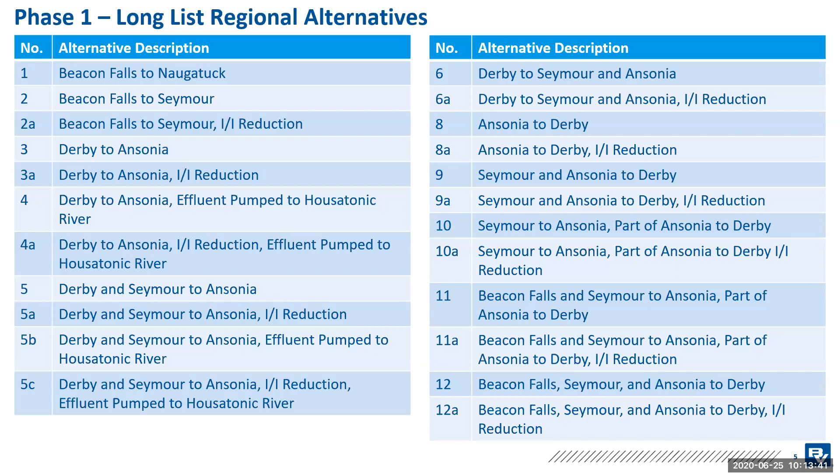So what we did was briefly review the methodology we used in task 2, which is we basically wanted to develop these regional alternatives, and by developing them we felt that we would understand them better, we would understand them more, and that their attributes, particularly their not-so-good attributes, would reveal themselves, and thereby that would be an opportunity to screen them out.

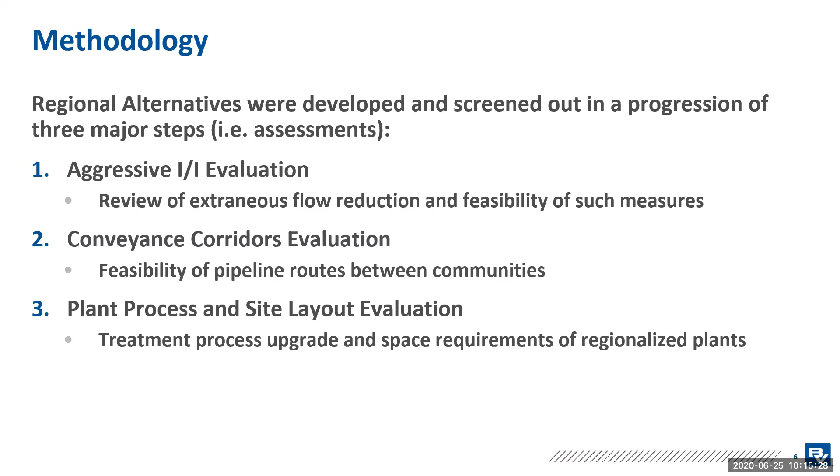We did that development by looking at 3 steps, which are really planning engineering assessments. We took a look at aggressive I&I, we evaluated whether we can remove extraneous flows from the systems, and whether those measures were worthy of keeping those alternatives in, or whether they should be screened out. We looked at the conveyance corridors as well, the feasibility of pipeline routes between adjoining communities, and then we did a treatment plant process and site layout analysis, to determine whether in a regional setting we could fit treatment facilities at these sites. That information was all critical to us, and it allowed us to step through the entire process.

So I'm going to turn this over to Jeff, and maybe you can review with us what we did in terms of I&I evaluation. Yep, thanks, Mario. Can you guys hear me okay? Yeah, very good, okay, Jeff.

So just a note on aggressive I&I evaluations. As Mario noted, generally each of the alternatives had 2 flip sides of the coin regarding infiltration and inflow, which is I&I. One is kind of a normal approach to I&I removal, which is actually aggressive in its own right, aggressively tackling major sources of inflow, roof connections and downspouts that might connect to the system, or even rapid infiltration, identifying the sources and doing point repairs and things like that. So when we talk about an aggressive I&I scenario, that's actually very aggressive. We don't mean aggressive infiltration and inflow getting into the system, we mean an aggressive approach to responding to that infiltration and inflow. So an aggressive scenario would be actually trying to reduce the average flow getting into the system, not just the rapid storm flow, trying to get basically all infiltration out of the system, trying to seal up the sewer system to the greatest extent possible.

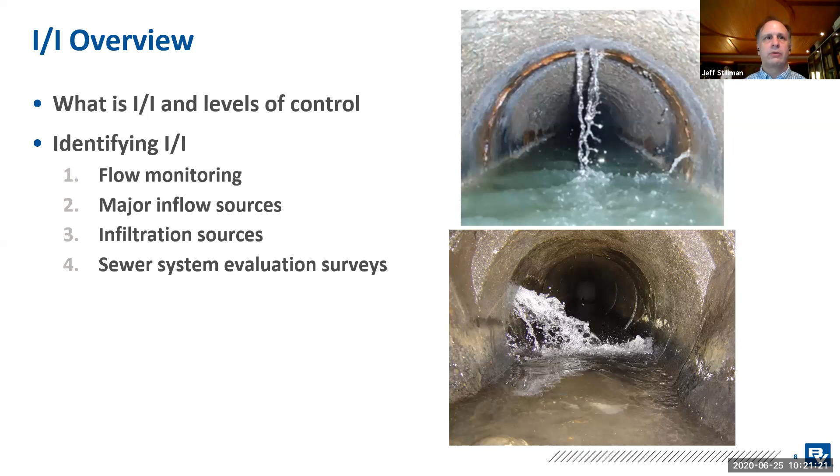If they are, that's a problem—it's more of a combined sewer system. But you can have a storm sewer pass through the same trench as the sewer, and then it leaks through joints and things into the sewer pipe. So those can be very rapid sources of inflow.

Another common one is manholes—basically if the manhole's in a relatively low spot on the ground, water can pond on top of the manhole lid and get into the sewer very quickly.

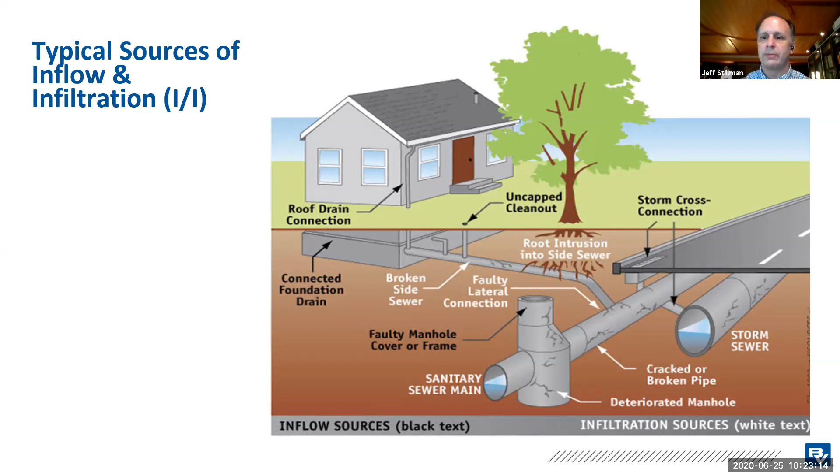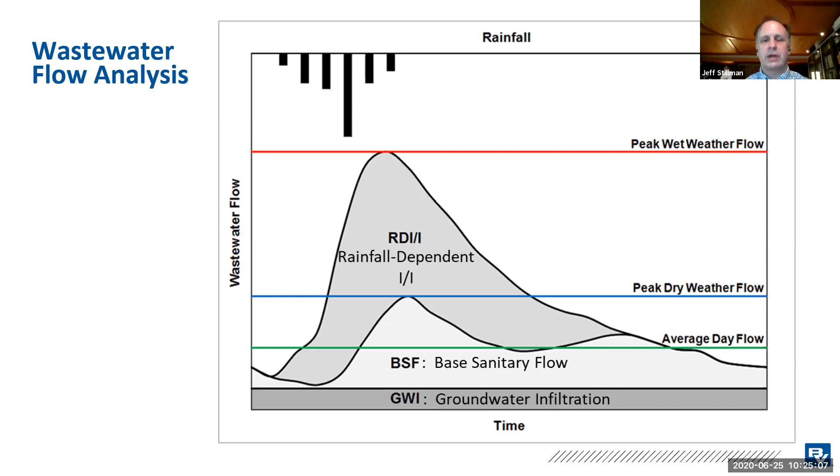This is more indicative of an inflow event with a little bit of infiltration. We get into breaking down those curves when we have good flow monitoring data, and I'll talk about that a bit more in a few slides when we get into the flows that we have for each community.

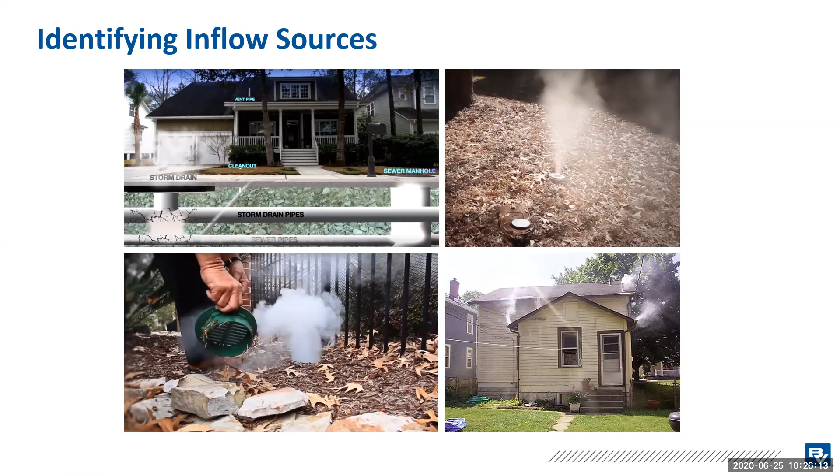So just looking at what's been done in each of the communities in recent times regarding identifying and doing sewer system evaluation surveys—Derby's actually been the most active in recent years, largely because of the consent decree. They had a long period of neglecting the sewers, but they stepped up and have been doing quite a bit of activity.

Starting with the SSES surveys in 2016, 2017, and a little bit of planning before that, they're now actively engaging in projects to remove sources—starting with inflow and now moving into some of the infiltration and storm drain connections. It's a very active program, hoping to see some reductions in peak flow come out of that. Still waiting for the flow data to catch up with it, basically, but that's some good news.

Ansonia and Seymour haven't been as active.

Basically, there hasn't been a citywide I&I program in over 15 years in either of the cities. And all three of those communities, Derby, Ansonia, and Seymour, when we looked at the monthly operating report data, they have excessive I&I. We can see high peaking factors. I'll talk about that in more detail in a bit.

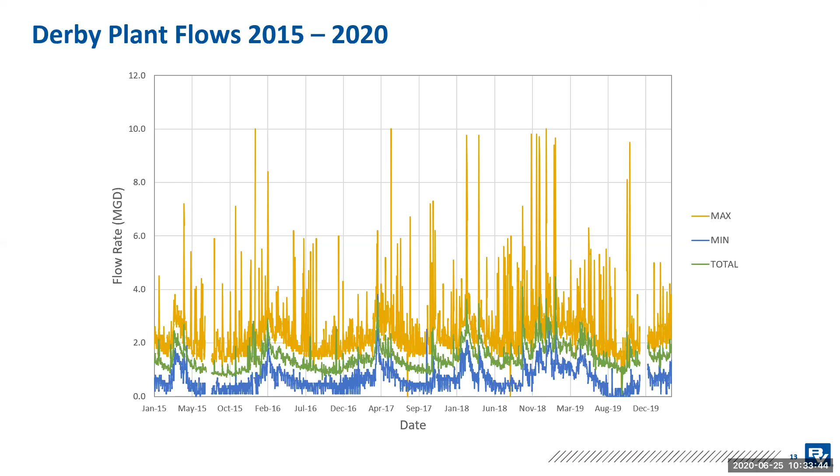Jeff, one more point here is that these flow measurements are being provided by the flow meter at the treatment plant, and that flow meter does sort of reach a top end limit at 10 MGD. So these peaks could actually be even higher. Is that correct? That's a good point.

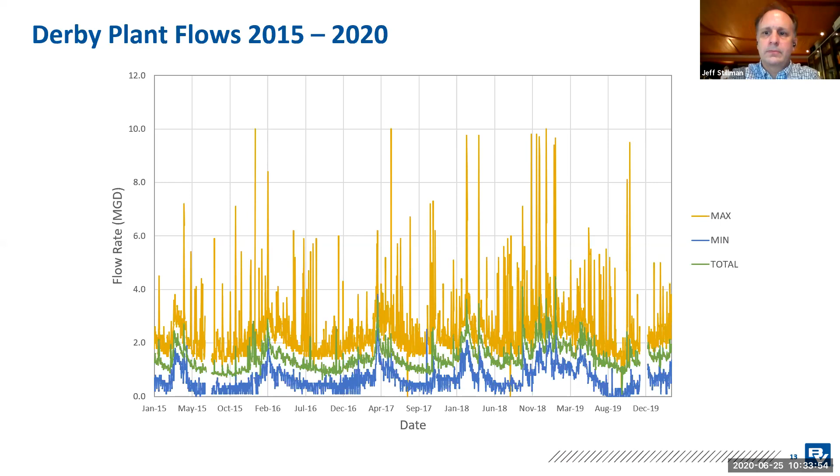Because that's pump driven, we don't know the actual peak flow in the system. Basically, the flow could be backing up in the interceptor upstream of the plant, and there's some storage that could be helping to manage the peak flows. That's where the flow metering data we have from the spring is going to be helpful to identify some of that I&I behavior. But regardless, even if it's a 6 or 7 peaking factor, that's still excessive, and so inflow reduction is going to be needed, and certainly infiltration as well.

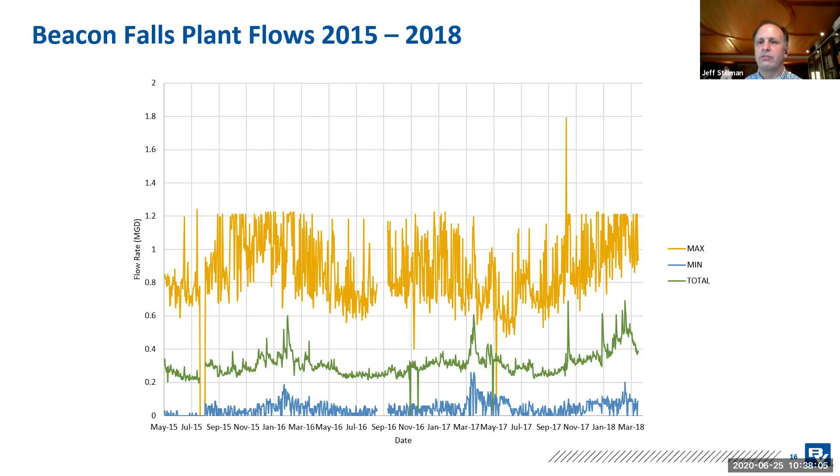You can see that there is peaking coming out from storm events and groundwater, but it's not as highly noticeable as the other systems. That's why we say it's not a strong candidate for aggressive I&I removal.

And then we've got Naugatuck. We had a longer period of record here. Was somebody going to say something?

No, okay. And we also have much higher flows, with a good deal of variation. So the green line is actually quite variable over time, as is the orange line. So it's much harder to interpret this, but there are significant peaks. If we look at the low points of the green line, it's around 4 to 5 MGD, and then we have peak flows up around 20 to 25 MGD. So that's not as high of a peaking factor, but it's quite high for a larger system still.

And I should note, Naugatuck is also under consent order related to flows, so they'll be doing more activity with the new operations procurement coming up.

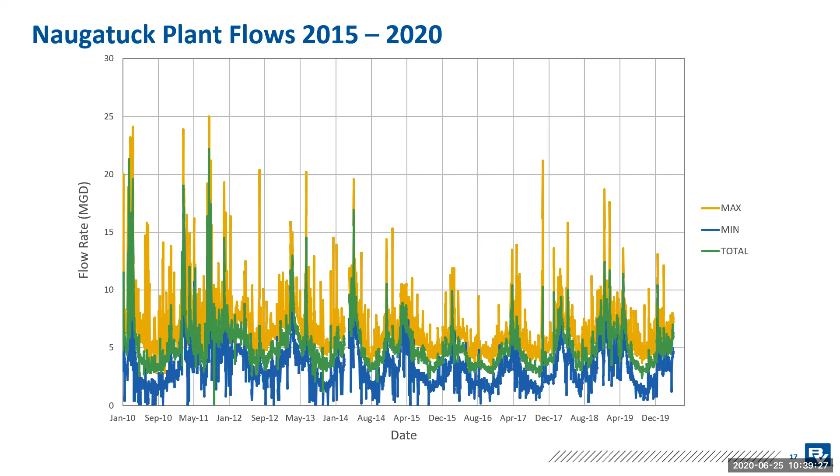So with that background, I wanted to talk about whether to do standard I&I management or aggressive I&I removal. I want to reiterate, standard I&I management should still be aggressive—there are problems here that need to be resolved. But aggressive is a different level.

So what do I mean by standard I&I management? Usually we're targeting the peak flows. We are targeting infiltration, not just inflow, but really targeted on the rapid infiltration, trying to get that peaking factor down, trying to get capacity into the system.

Usually the repairs are point repairs—a find and fix approach, focusing on finding the sources and controlling them. This might be through smoke testing, like the photos we saw, or finding defects through CCTV, looking for those inflow or infiltration sources, and doing a point repair to seal them. If there's too many point repairs in a given line, then you might line the whole pipe or replace the pipe, but you're not doing the comprehensive sealing of the system, which is what we'd be looking at in aggressive I&I removal.

Aggressive I&I removal is going to target not just the peak flow, but really target reducing the average flow. The reason aggressive I&I removal is often done to get down that average flow is if the plant capacity is borderline. So if you're looking at a potential moratorium on development because you don't have adequate plant capacity, and a large plant upgrade is in order, then aggressive I&I removal can be cost effective to make that capacity available without having to do a plant upgrade.

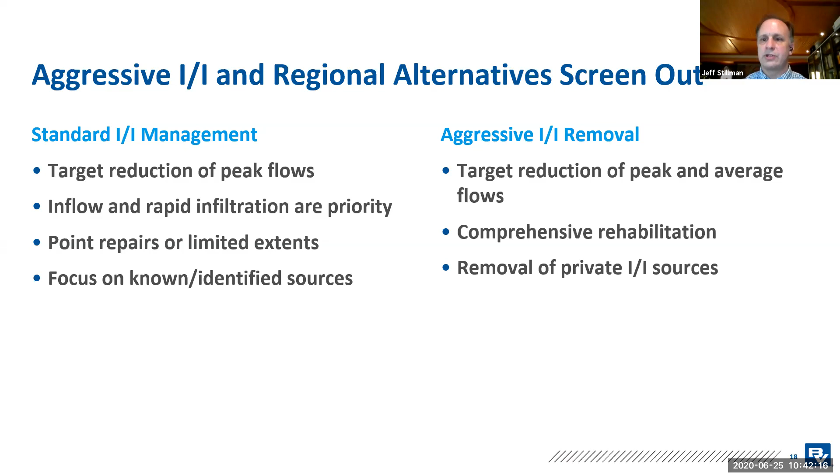And the contrast there is, in standard I&I management, you're focused on private sources to the extent that you have rapid infiltration or inflow sources, like from roof leaders and things, as opposed to trying to actually help rehab each lateral. So for some of the methods, I wanted to show some photos so people could see.

The CIPP, cured-in-place pipelining, is a very common approach where you don't have to dig as much with it, and you can just line the sewer pipe—it's a good way of basically doing the entire pipe and making it into a relatively seamless pipe to help keep out I&I. So that's a common approach in comprehensive rehab programs.

So is pipe bursting. Pipe bursting is more common in cases where maybe there's too many offsets, like the pipe was in quite bad condition. The CIPP just follows the alignment of the pipe, whereas pipe bursting can actually help correct some of the issues, though it requires a little bit more effort. Pipe bursting is also good for bringing in additional capacity into the pipe because it can usually go up a size.

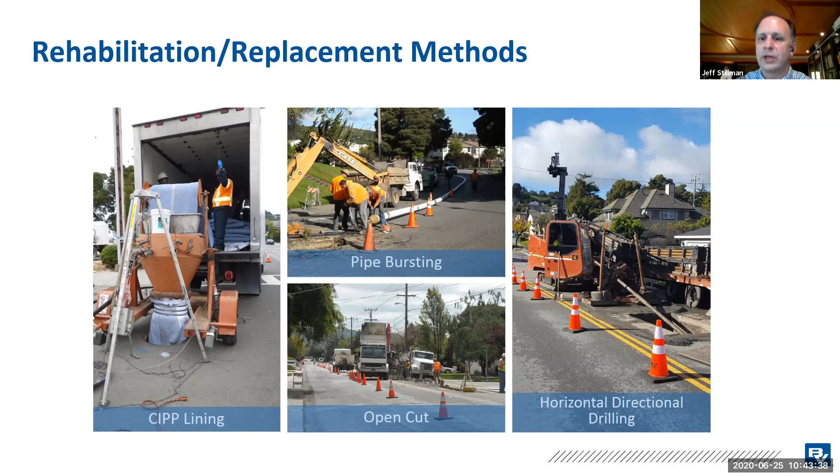Open cut is kind of, you just dig and replace the pipe. That usually leads to the best quality, but obviously it causes a lot of disruption in the process. And then you've got horizontal directional drilling, which is a way of putting in new pipes as well. So those are some of the methods.

When looking, there's a lot we can talk about with managing private I&I from houses and things, but one of the more common issues is where does the dividing line between the home and the system and the public right of way start? Some systems manage just the public sewers and say all parts of the lateral belong to the homeowner. But some say, well, when you're into the right of way, that lower lateral, you don't want to be tearing up the road to fix the lateral all the time. So a lot of systems take over management of that part. And then there's the part that goes through the yards and things.

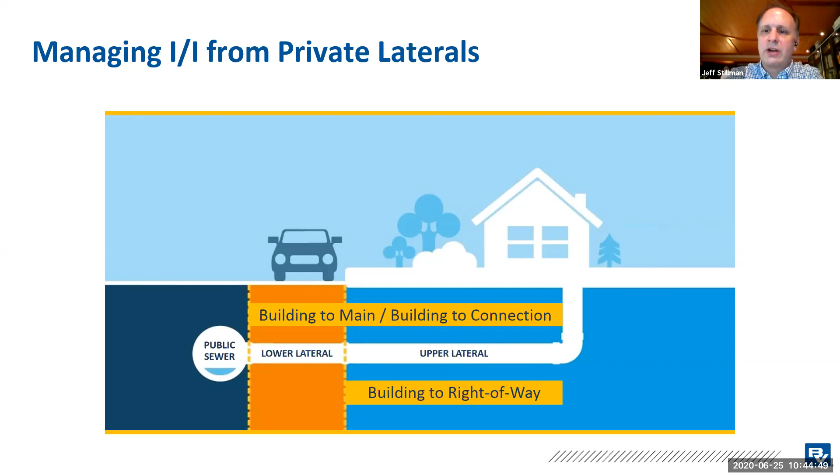Managing that upper lateral is often one of the larger sources of I&I, and it's one of the dicier things to try to manage. So you have to think about the guidelines and regulations, building codes and things associated with that, so that it becomes a more comprehensive management approach when you're trying to manage private I&I.

Based on some of that discussion, we definitely see infiltration and inflow in each of the systems, and we definitely need to be doing I&I reduction. But largely because each of the alternatives requires plant expansion, plant combination, and trying to consolidate plants, plus the fact that we don't have in-depth flow monitoring data, and there hasn't been extensive I&I reduction programs going on, so there isn't much of a history in each of the communities, we didn't see a strong rationale to do the aggressive I&I removal.

We think that a moderately aggressive program in the base scenario is going to be enough to reduce the peak flows, and not lead to further deterioration of the system. We didn't see much of a need to increase the available capacity of the system because we would be doing plant work as well, which would just increase the costs significantly to try to do comprehensive rehabilitation. So for that reason, we said, okay, we can get rid of those alternatives for aggressive I&I reduction.

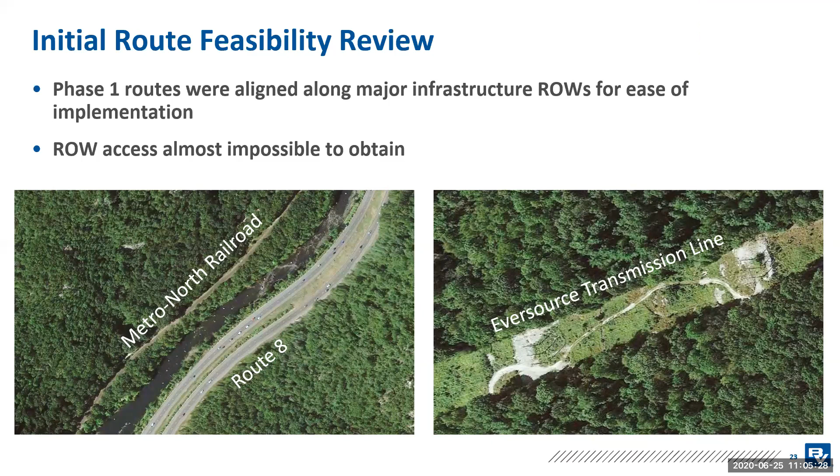So what we did was a kind of pipeline routing analysis. We started developing these pipeline routes. We took a look at their physical attributes. We identified the length, came up with approximate sizes. We took a look at topography and said, do we need pumping stations? If so, where? We took a look at topography, geology, and environmental factors.

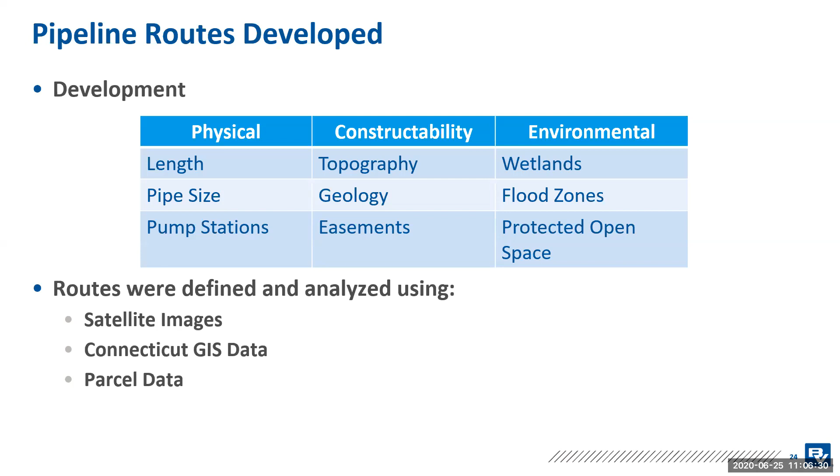The information we used is shown at the bottom of this slide—there's so much great information in the public domain these days. The Connecticut GIS data is very admirable, even compared to many other places in the country where we work. Great information we were able to obtain from there, plus satellite images we pulled information from.

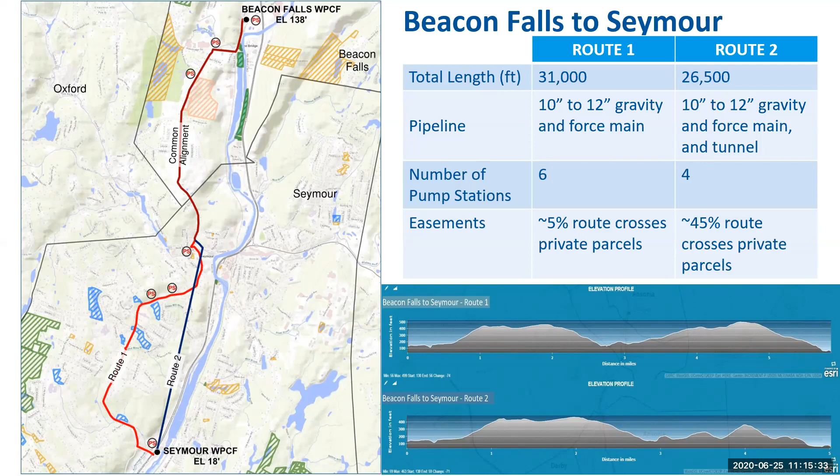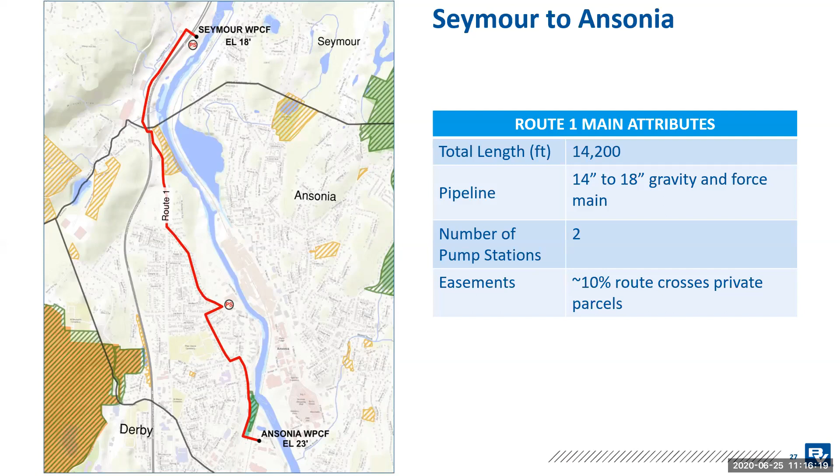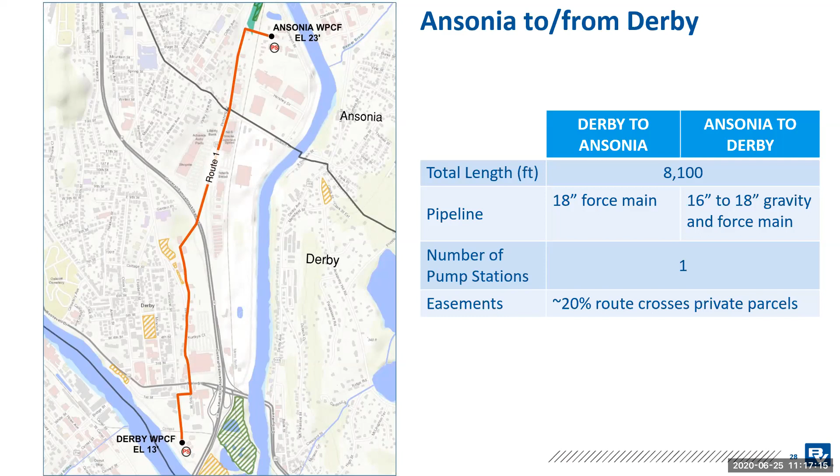So what we concluded was that after the conveyance corridor assessment, we removed the alternatives that go from Beacon Falls to Naugatuck and Beacon Falls to Seymour, and we were able to cut 4 more alternatives from the group that were already cut in the aggressive I&I evaluation. And that's what I've got to report on this second series. Any questions here?

Is there anyone from the towns? I obviously do, but if anyone from the towns has a question, please go first. I have one as well, but I'll let you go first, Rick.

So Mario, we've had this conversation before, and I understand the point of view in the evaluation. I think the problem with eliminating the use of the Route 8 corridor completely, just foreclosing that without at least putting a number on it, is that that's really a political decision. Frankly, it's not an engineering decision. DOT is going to say no — I know DOT is going to say no — but it has to be someone else's decision, and it has to be a 'yes' political decision if it happens.

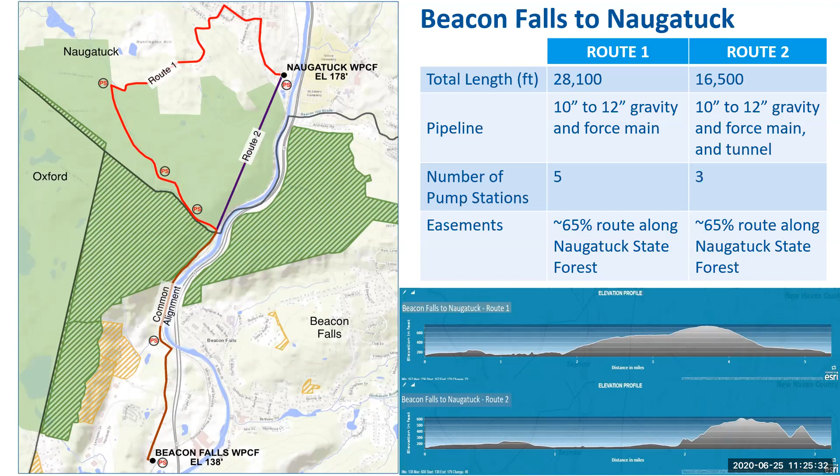Did I lose you guys? No, no. Okay, looks like something is happening now. Yeah, looked like my picture's computer was frozen, acting up.

Yeah, so we're not using existing pipes, Rick, using existing streets - because I think it's better off if we stay away from the highway, stay away from the river, stay away from the railroad altogether, because we can, and it's a good way to do it, to just stay away from those. It's just that we couldn't - I mean those were very attractive to us going north, but then it's just not feasible for the reasons we said.

Mario, we no longer have your video or your desk. We only have your audio on the phone.

Just give us a minute. I mean, if you need a little time, we could jump to the Collins Center and have them do their part, and then we'll come back to you. Yeah, go ahead. Right.

So do you need desktop, Sarah or David? Sorry, I was muted.

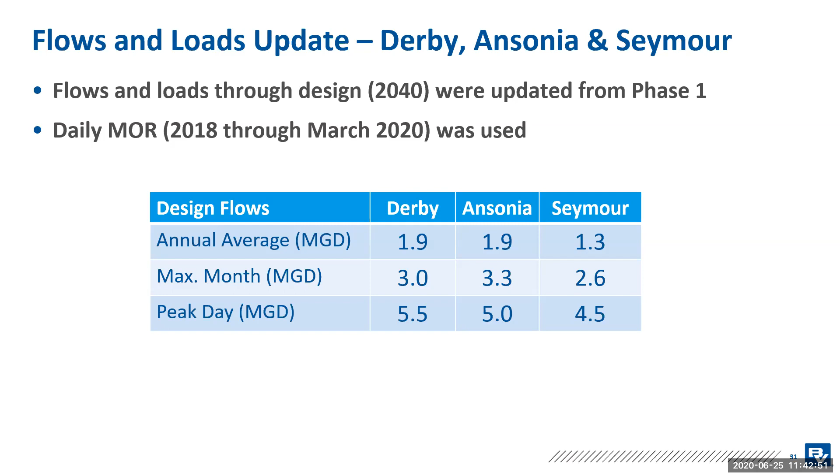So in the capacity assessment for the treatment plants, we looked at the ability of these existing plants to handle their own individual situation — the base case — and then the combined flows needed for regionalization. What we took a look at in this assessment were the parts of a treatment plant that have the greatest need for land area, and those are the processes associated with primary treatment and secondary treatment.

You might say, what else is there? Well, there's sludge processing, preliminary treatment, disinfection — we did not take any of that into account in this assessment. However, we will be prescribing costs for those in task 3 when we develop our cost model. What we're looking at here is whether these plant sites can handle the treatment required not only for themselves but for these regional alternatives. Again, if the answer was no, then those regional alternatives would fall away.

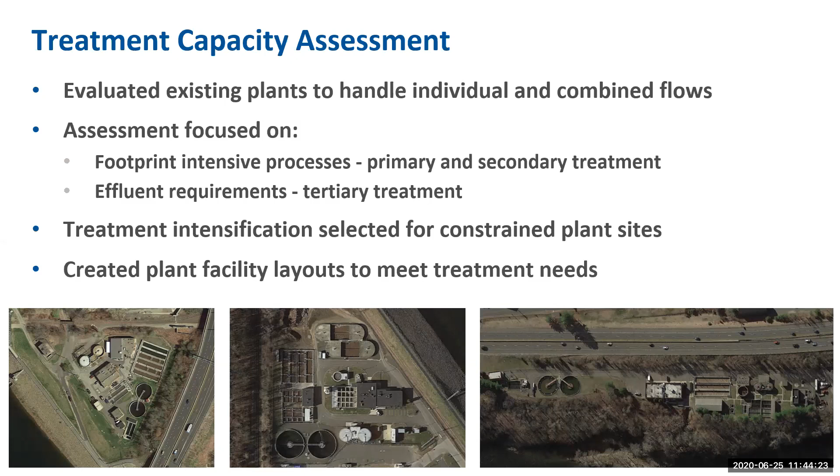We took a look at treatment intensification for constrained sites. So we're going to get into that here in a minute, and then we'll get into the layouts themselves.

Bear with me just a little bit. I won't go into this too deep because I don't want to lose anybody, but we took a look at treatment intensification in these areas.

Some acronyms: remember CEPT, chemically enhanced primary treatment. What does that do? It allows us to handle higher flows by increasing surface overflow rates to primary clarifiers. That's a good thing when you don't have a lot of space.

Ballasted activated sludge, also called biomag, basically by the addition of a magnetite, which is an inert iron ore, allows us to enhance settling. You might say, so what? The reason is that it also allows us to get more settling in a given space.

That's a good thing. Then we've got this other acronym, IFAS, integrated fixed film, which uses a plastic media to basically increase sludge inventory in a plant. That also allows us to shrink the footprint of an aeration tank or bioreactor.

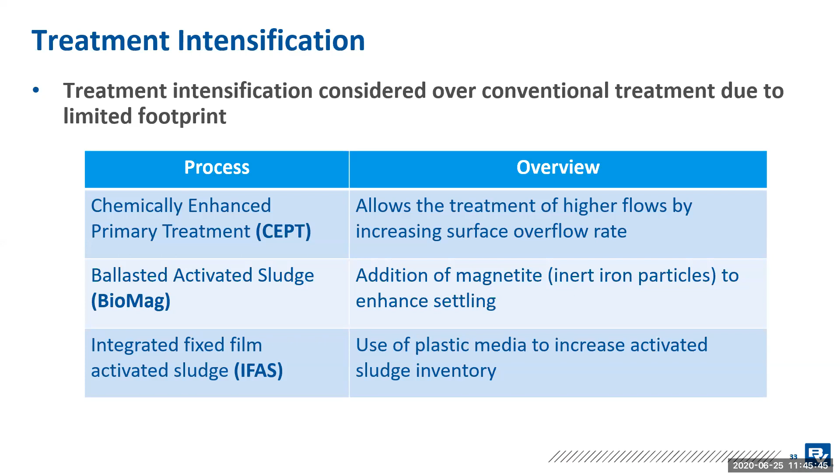Three slides - we won't go into this too deeply, but here's the chemically enhanced primary treatment slide. We've got the primary clarifier over to the left, basically a settling device. If we add that chemical identified in red, off to the left in the raw wastewater, some chemical coagulant, we can increase the throughput through that primary clarifier with the same size unit.

That graph on the right, don't study it too deeply, but it's showing performance on the y-axis. With the conventional process, if we don't use CEPT, the performance drops as the settling rate increases, as the overflow rate increases.

But with CEPT, we can maintain the performance while also increasing the surface overflow rate. With CEPT, we could increase the primary clarifier capacity by approximately 3 times, and that's safely - perhaps even more, but that would need further study, but certainly 3 times.

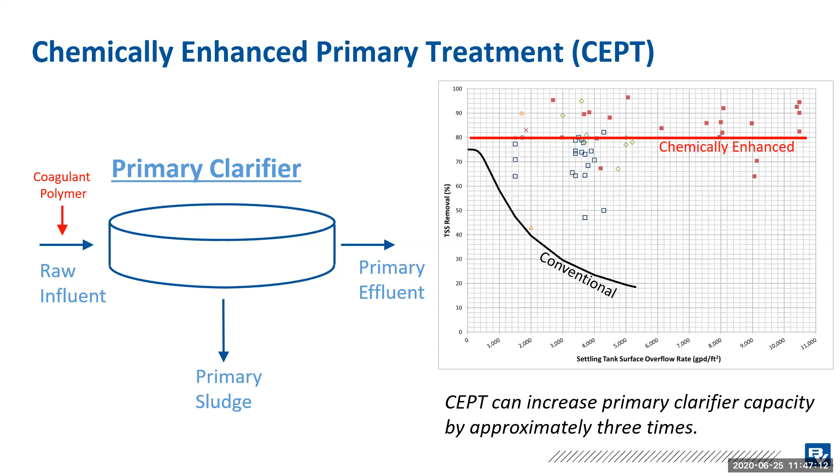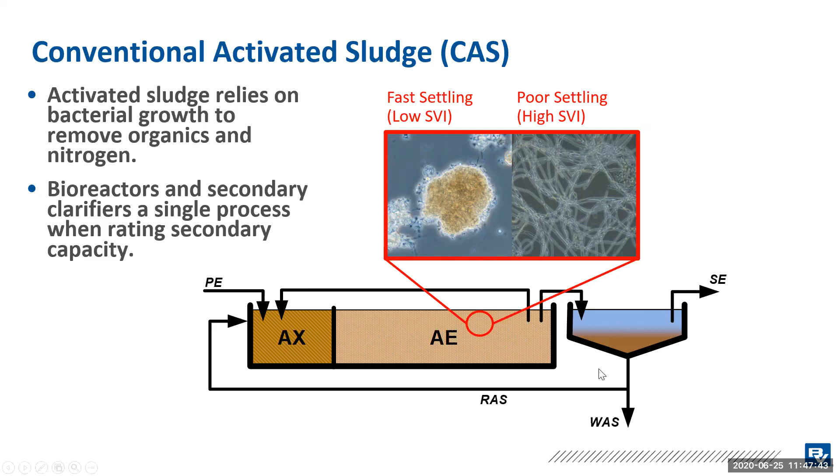With conventional activated sludge, again taking a look at these two reactors, we've got the reactor over to the left, which is the aeration tank, and we've got the settler here on the right. They work together, and bioreactors and secondary clarifiers are treated as one unit when engineers size secondary treatment.

With IFAS, what we're doing is adding this plastic media into the aeration tank, and that means we can do more treatment with the same volume of aeration tank as we would. If we don't put the media in, we need more tankage, and that would make some of these treatment sites off limits to us.

With ballasted activated sludge or biomag, we can increase the settling rate, meaning the clarifier space - we can do a lot more with clarifiers if we use biomag. So with biomag, we can take advantage of the same clarifier. With IFAS, we can take advantage of aeration tanks.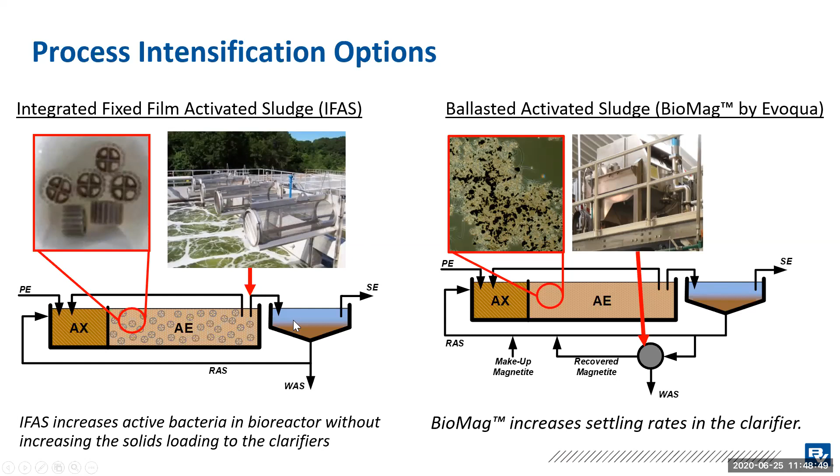I'm giving you this in real rapid fire mode, I understand. So I'm going to have Will review what the base case and the regional alternatives look like for the treatment plants. Will, you want to do that?

Okay, I know we don't have a whole lot of time here. I'll try not to rush, but we'll certainly try to get through everything. As Mario mentioned, what we looked at is ways to utilize these plant sites to the best of their abilities without having to expand them too much. In some cases, that resulted in some intensification options to utilize that existing infrastructure.

But where we did have space, we didn't necessarily go straight to intensification, simply because those processes can be more costly, especially from an O&M standpoint.

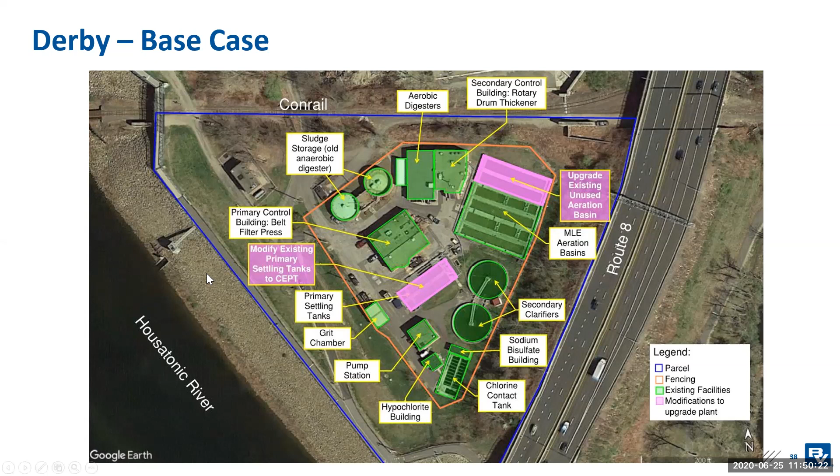You'll see that the Derby plus Seymour alternative is identical as far as conceptual layouts here. Seymour and Ansonia have very similar flows, so that didn't surprise us at all.

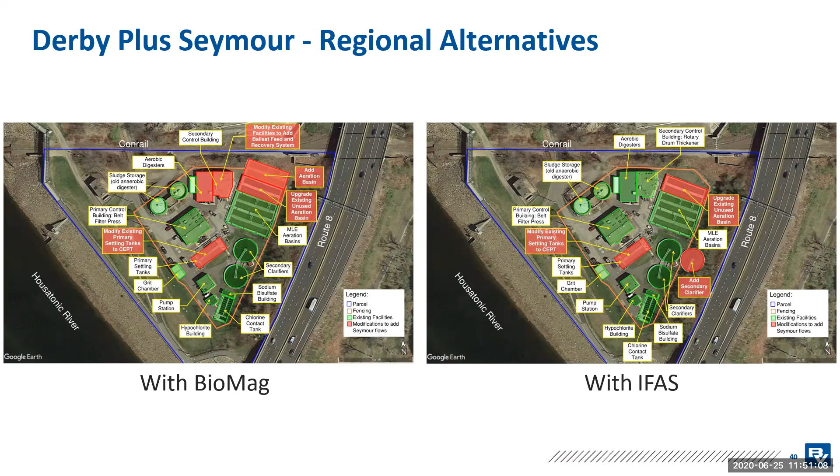So moving ahead into Ansonia here, south to north. Ansonia as a base case, we've determined that the plant has adequate treatment capacity for its 2040 build-out, so no improvements are required there.

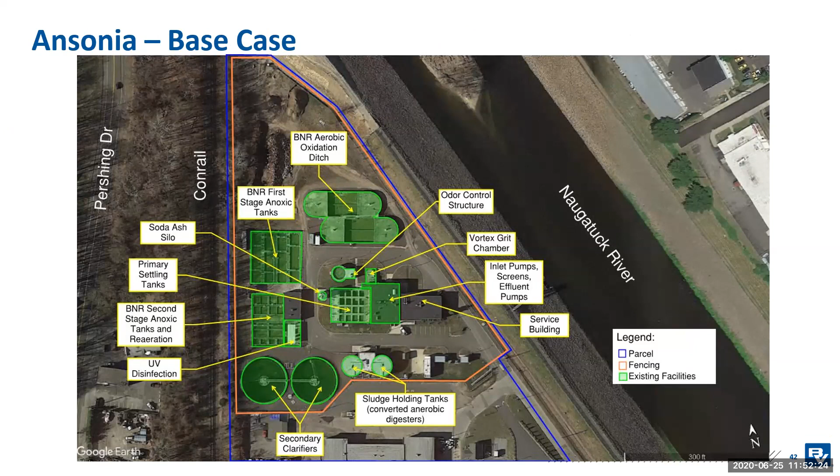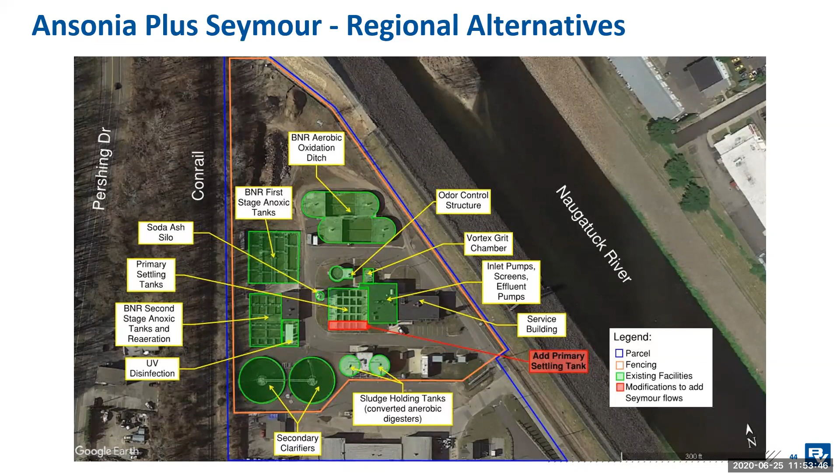For the Ansonia plus Seymour alternative, because Seymour has a phosphorus limit, combining that with Ansonia would not require an additional phosphorus treatment facility as far as we can tell from our Task 2 analysis. We would just need to add a primary settling tank to handle that additional treatment. That could be accomplished with CEPT using their existing tanks, but we believe additional infrastructure would be a more reasonable cost in the long term.

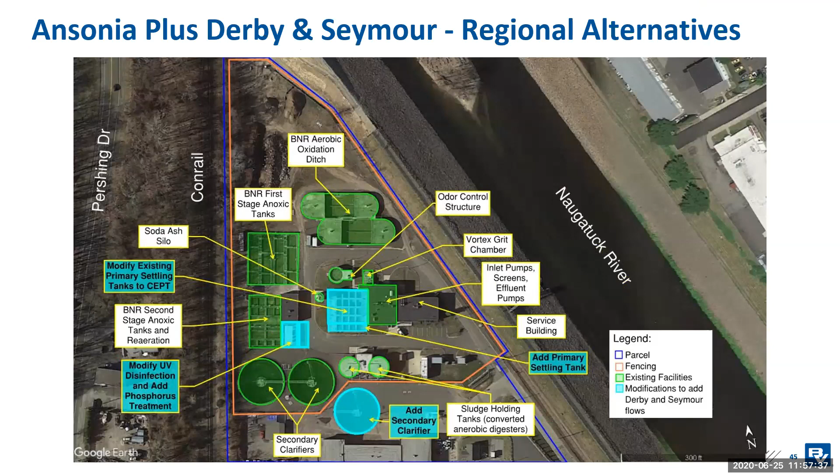So Ed, you're talking about in reference to this site, you would be talking south of this site, or the area north? Let me see, I believe he's talking about the road to nowhere. Yes, behind BJ's. So that would be north? Oh, he's talking about on the Derby side. Correct, which I believe the city just sold.

There are pieces that have been sold. We've been talking with some of the people in the city. They did sell a piece, but they might be willing, or those people might look into reselling it back, or consider a land swap. There's a couple different alternatives, but there's still land down further closer to the back of Home Depot, closer to Route 34, that could be a possible option as well. This would take out a lot of the size requirements associated with either one of the plants being undersized.

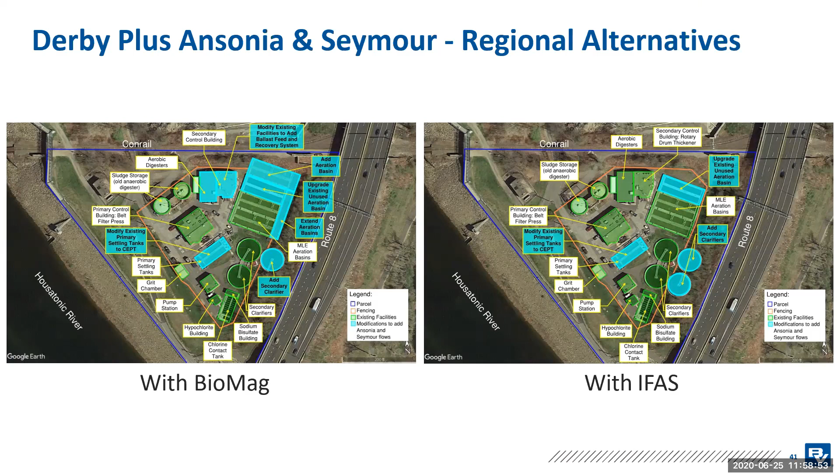So I would just invite Drew or Jack to comment. Is that an option that you think we should be pursuing before we even get to the engineering feasibility?

So Rick, I actually unfortunately walked away, I just heard the tail end of what Ed said. I had to go let a vendor in the door downstairs since we're closed to the public. So I heard the tail end about a possible land swap and things like that. Is that what the question is?

And I actually would defer to both Jack and you, Rick. Rick, you're way more familiar with the area and the adjacent train station and things like that than I am with my two years here. I know you've been involved in that area for a long time, so I'd be interested to hear your opinion and Jack's opinion.

Well, Rick knows a lot more about it than I do. I think it would be tough. I really do. But again, I would defer to people who have a lot more expertise than I do. I don't know how big the parcels are, and again, I don't know how cost effective it would be in the long run.

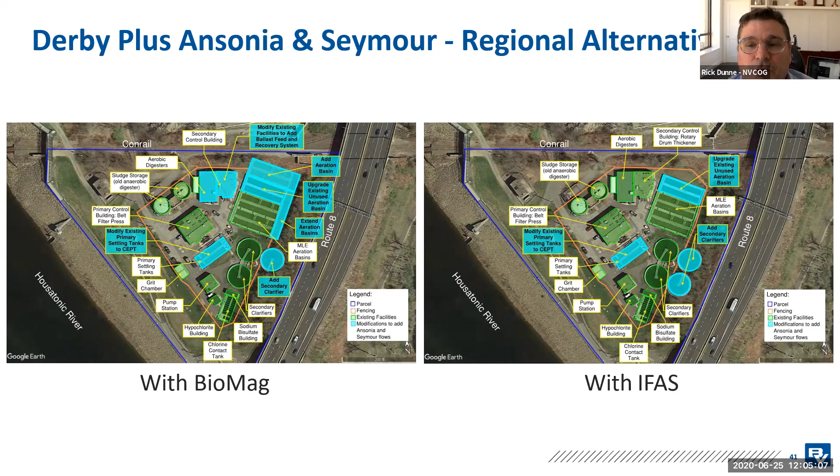So I want to introduce one other idea while we're looking at the regional alternatives for Seymour, Ansonia, and Derby. Has Black and Veatch looked at going through with the Ansonia plant to combine all three, but continue to discharge the effluent into the Housatonic River through Derby? Yes, we did.

Basically eliminating the phosphorus requirements on the Ansonia site and using the existing pipes that run almost completely from Ansonia to Derby. The treatment requirements would be essentially the same as we've identified here on this slide, but the phosphorus treatment may either go away entirely or be greatly reduced.

Rick, okay—so these facilities we've identified, shown here on this slide, would be the ones if we bring back the treated effluent to the Housatonic and discharge it at the outfall location where Derby is discharging now. However, we'd need to take a closer look at what the treatment facilities here exactly mean. This baby blue box might go away in its entirety or be substantially reduced.

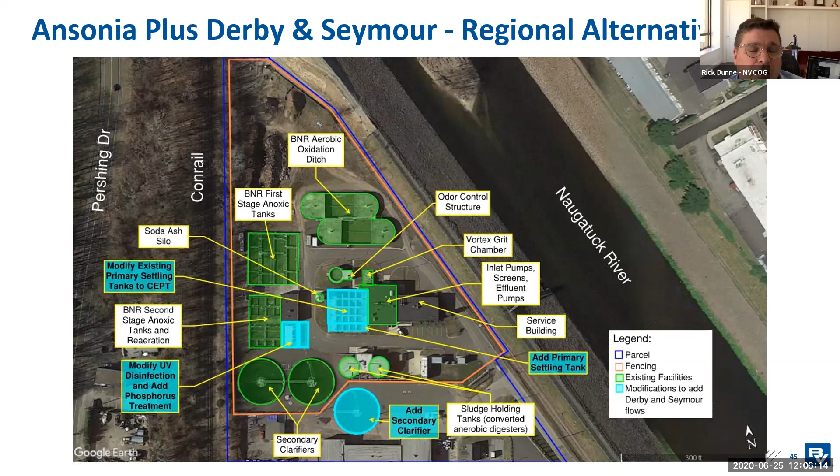That's what we're saying. I'm just asking if that option is still in the mix. Yes, absolutely. Yep, okay. Yes. Basically, this is what came out of the treatment plant layout and treatment assessment subtask—that all of these would be in the mix.

We're going to look at that one a little closer in Task 3. This could actually be a phasing of alternative 10, or alternative 10 could be a phased version of 9. And the one that would drop away is Derby to Seymour and to Ansonia, where part of the flow from Derby would go to Seymour and part would go to Ansonia. We felt there was no need for that alternative to stay in the mix because there's already capacity at the Ansonia plant to handle Derby—so why send part of it up to Seymour?

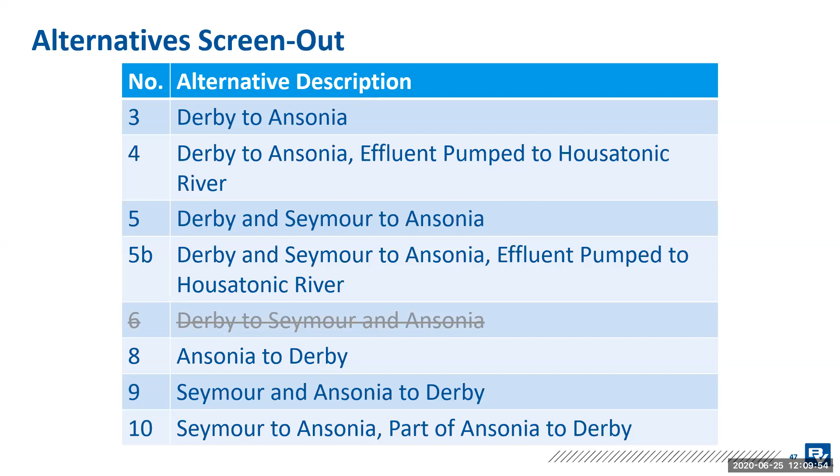Thank you. All right, are you onto your near final slides, Mario? Very, very close. So basically, the short list of regional alternatives that came out of Task 2 are these ones that we've identified, these 7. We will go back and take a look at that request that you and Jim Stewart have asked us for. We'll put that in and we'll give you that information as well.